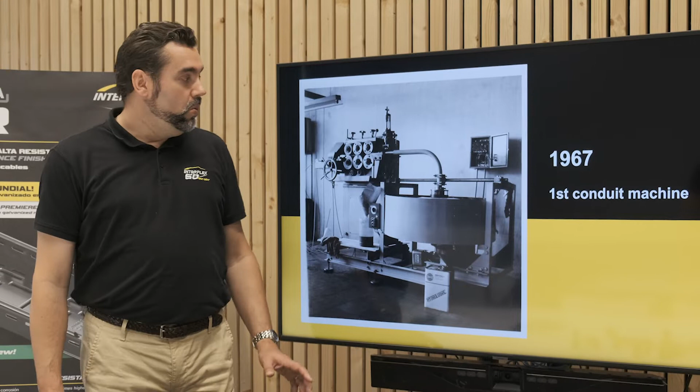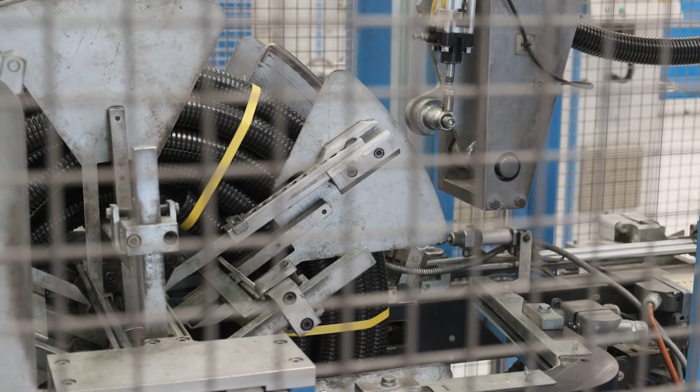INTERFLEX is a Spanish-based company located in Montcada i Reixac, a small city near Barcelona. Founded in 1967, the company continues to be family-owned. We are specialized in cable protection and management systems produced here in Montcada. We are the only Spanish manufacturer of a cable protection system made of polyamide, and one of the main producers of cable tray systems in the Spanish market.

We also have a long-standing tradition for exporting these manufactured products, with a wide presence in international markets. We actually sell our products in 48 countries across 5 continents.

INTERFLEX provides a close relationship to its customers because we are family owned and tend to be very tightly connected with them. Both Xavi and I belong to the second generation of the company, which shows INTERFLEX's commitment to go further and further.

We have a very ambitious plan for growth in the next 5 years, and for this reason we've made very big investments in our facilities over the last 2 to 3 years. We'd also like to remark that customer-oriented value is critical in our company approach, as well as our honesty, commitment, competence, and consciousness about environmental change.

INTERFLEX completely renewed its offices, production and secondary warehouse in 2020. The surface for this amounts to a total of 17,000 square meters.

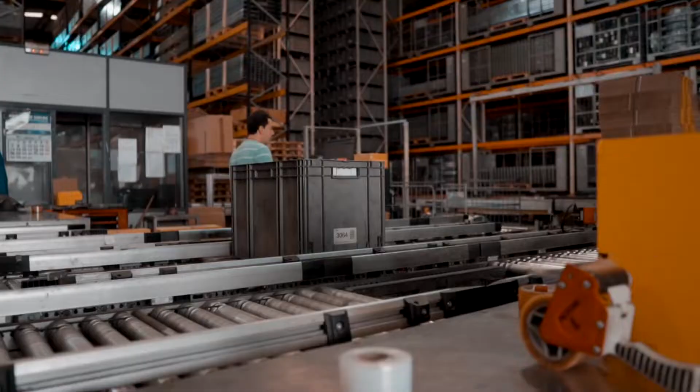INTERFLEX also has a completely automated logistics center in the same industrial estate, reaching 5,000 square meters to secure fast service, plus additional logistics centers in Spain in cities like Madrid and Bilbao. Our branch company is based in Colombia for service and deliveries into the Central and South American markets.

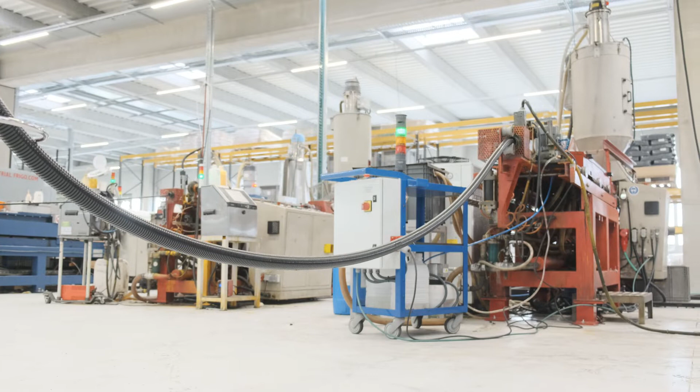We are one of the few producers in the world of a complete polyamide flexible conduit system. The main objective of this product is to protect electrical cables from mechanical and environmental hazards. Xavi will now explain the main features of these very versatile products.

The first advantage is the extreme ease of installation. To install the conduit, you just need to insert it inside the fitting, which gives an already high IP66 protection degree. To release it, you just need to push the release ring, twist the conduit and pull.

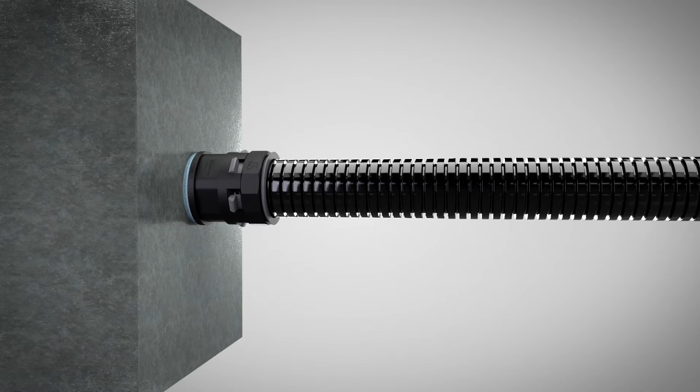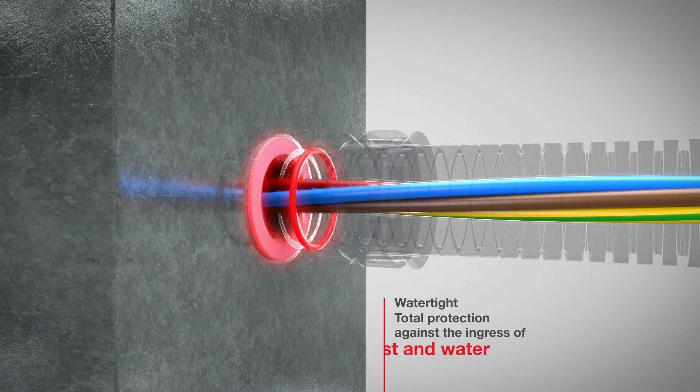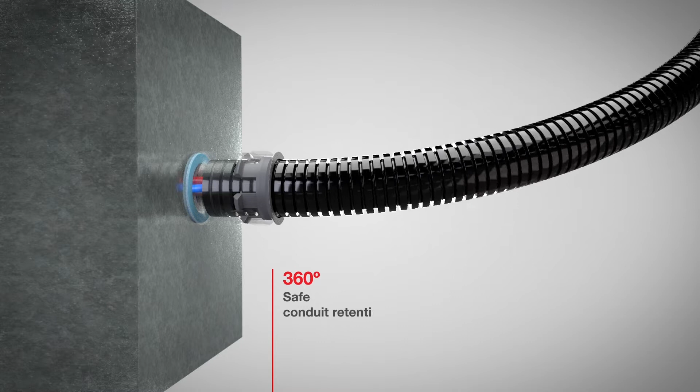In case you need to increase the protection against the ingress of water, you can increase to IP68, IP69, simply by adding an O-ring and a sealing gasket. This simple solution is possible thanks to the specially patented profile of our conduits, unique on the market. This gives complete protection against dust and water, increasing the safety of the equipment. The special connector design ensures a 360-degree retention of the conduit, increasing pull-out resistance and better behavior for dynamic applications.

Some customers ask us why we have such a big amount of conduits in our catalog. What can you say about this, Xavi? Well, the advantage of having such a wide range is that we can propose the best solution for the customer's needs. For example, depending on the mechanical requirements of the installation, we have different impact and compression resistant values, as well as models for static or dynamic applications, such as robots. This gives them a broad application range.

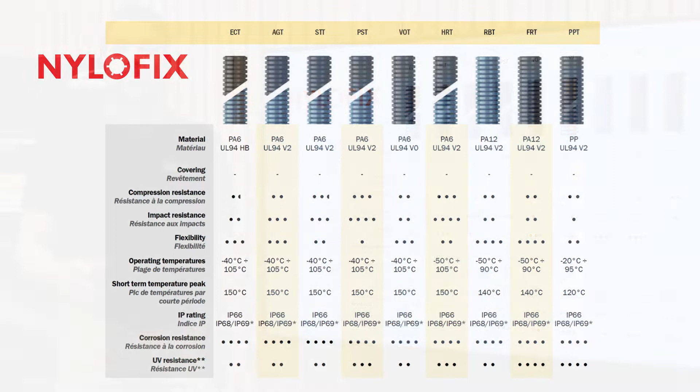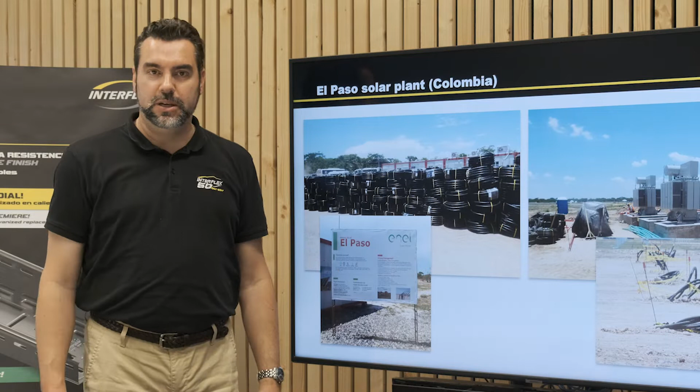We will give you 3 real application examples that showcase the advantages of this product range. The first is a solar power plant. This type of energy is having a big boom at the moment. Here we have an example of an installation made in Colombia, at the El Paso power plant. These installations suffer high UV radiation levels, which is a concern for most engineers, as ultraviolet radiation tends to destroy plastics after a few years.

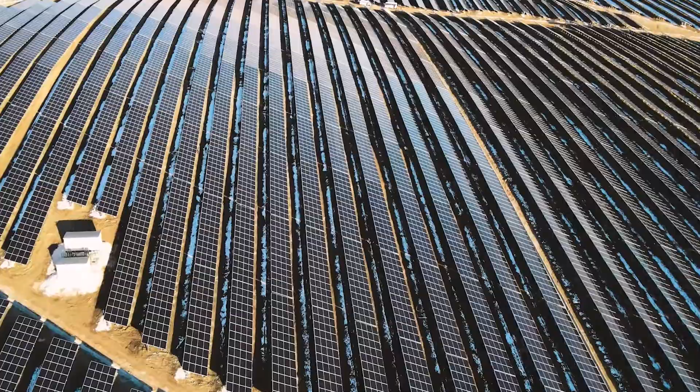Even though our black conduits ensure correct UV resistance, there is no specific test or assay for UV resistance in the standard for flexible conduits, IEC 61386. For this reason, at INTERFLEX we have drawn upon the North American standard UL 746C, which tests the outdoor resistance of plastic materials, making us the only manufacturer of flexible protection systems for industrial purposes with a certificate for ultraviolet resistance for conduits. Search for the F1 classification and the UL 746 logo.

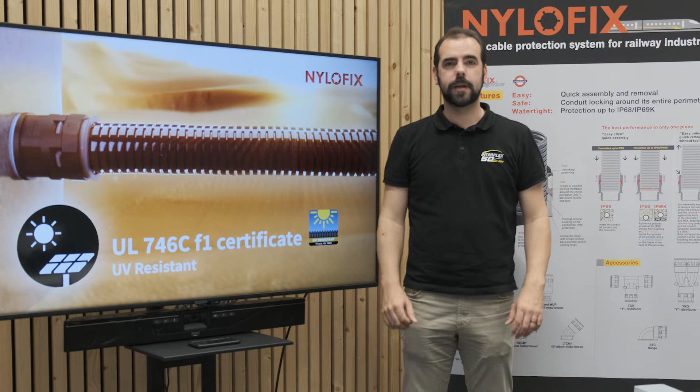This means the conduit model has been tested and certified for outdoor resistance, keeping its mechanical and physical characteristics intact. There are a few models with this homologation, with different versions for increasing crash resistance, and also a specific model, PPT, able to be installed in extreme environments with extremely low or high humidity levels, for example permanently lower than 20% or higher than 80%.

Another application where polyamide conduits are highly popular is windmills. The reason is that polyamide is inherently corrosion resistant, which means conduits and accessories will not be affected by aggressive environments, such as offshore installations with a high saline concentration.

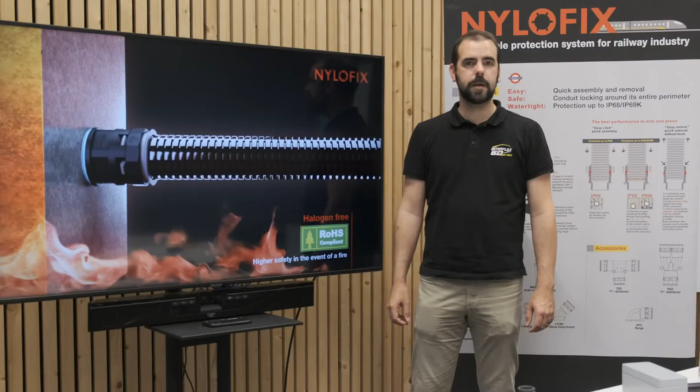Xavi, there's a good reason to install polyamide conduits instead of other types of plastics. Why is that? Yes, that is because all our INTERFLEX products are made of polyamide, which means they are halogen-free. There are different fire or burning ratings according to the UL 94 norm, from HB to V0, but all conduits are self-extinguishing, which increases installation safety in case of fire.

Moreover, polyamide conduits have a broader temperature range, going as low as -50 degrees, with -40 being the standard, and as high as 105 degrees Celsius, with the possibility to increase up to 120 and 150 for a short term.

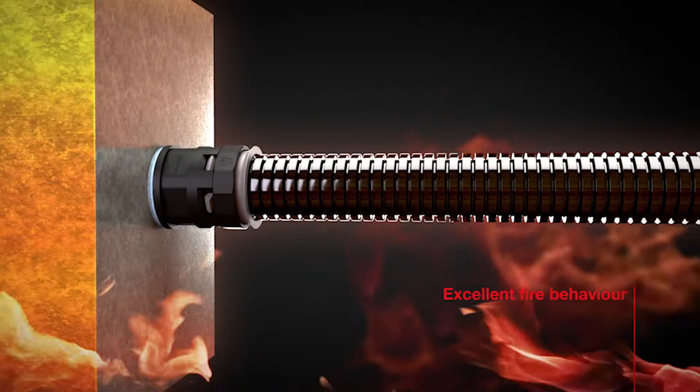This topic about fire brings us to another area where polyamide systems have been increasingly gaining popularity: the railway industry. This is one of the most challenging sectors. The fire requirements for plastic or flammable materials in general are very demanding. They need to comply with specific norms such as the European standard EN45545. Generation of smoke and its opacity are controlled in order to provide the highest safety standard in the industry.

If all these different options are not enough, we also have a complete range of metal conduits, which provide a higher mechanical resistance and withstand extremely high temperatures. It's made fully of metal and also offers ground connection.

Let's introduce the other main product range that we produce here in Montcada i Reixac. If your customers need to route their cables, look no further. We have the multi-via cable trays to support you, and it has two different versions: the VIATEC sheet steel cable trays and the VIAFIL wire mesh cable trays.

The VIAFIL trays are extremely versatile and can be shaped to properly adapt to different installations on site without the need of special accessories, simply cutting some of the wires and bending the tray. You can do curves, inside bends, outside bends, derivations, and you can do so using the wire cutters. We have mechanical versions like this one, or we have also electro-hydraulic versions.

There are many accessories that don't need additional bolts or nuts. You simply bend some of the tabs and fix the tray. They are called InstaFix, just like our new VIAFIL InstaFix, for which you don't need any bolts. You just click one length of the tray with the other, like so.

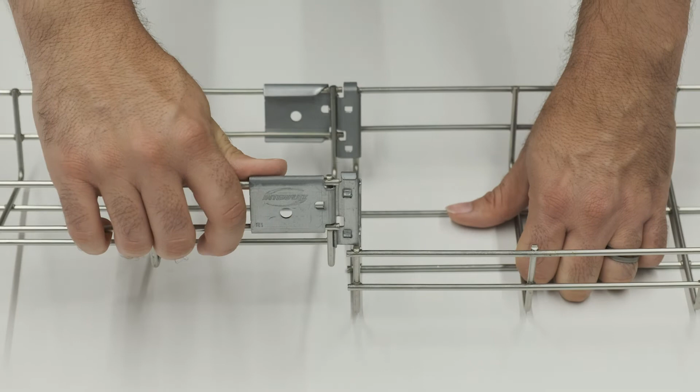This InstaFix system reduces the installation time by approximately 70% compared with a standard system. This is really especially important in big projects where time is very critical.

The other system, the VIATEC sheet steel cable trays, are also self-coupling, even though they need to add a few bolts to ensure the connection. You just need to approach one tray length to the other, lift one of the sides, insert the self-coupling part, and lower the side again.

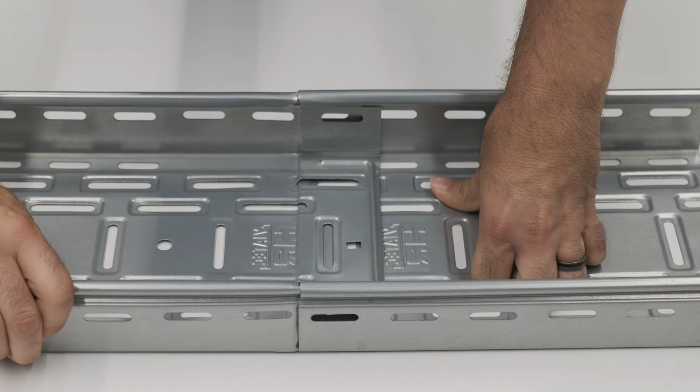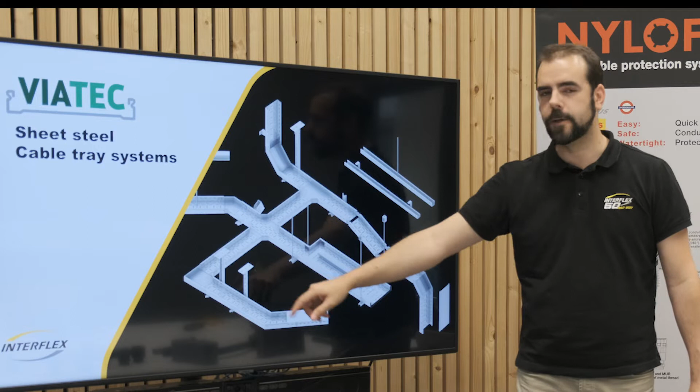The VIATEC trays also have a wide range of accessories like curves, bends, derivations, but it shares many of the equipment with the VIAFIL trays. You should check if there are any local regulations in your country in order to use one model or the other. But one of the main criteria to correctly select the tray is the corrosion resistance, depending on the environmental conditions of the installation.

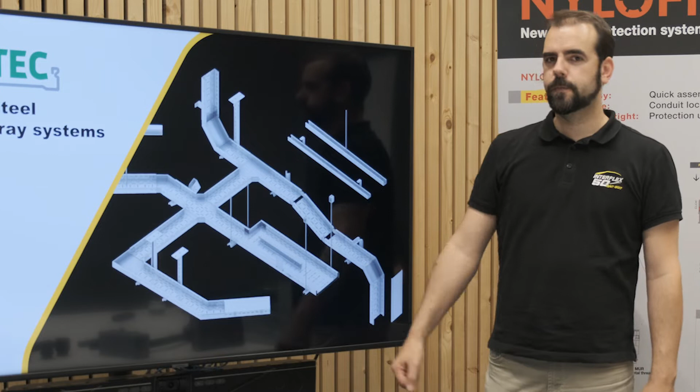For example, for indoor applications, we use either Sendzimir or Z3 electrozinc plating, depending on whether you are using VIATEC or VIAFIL cable trays.

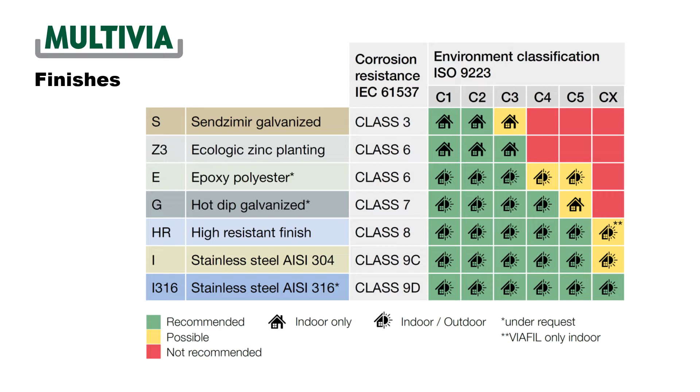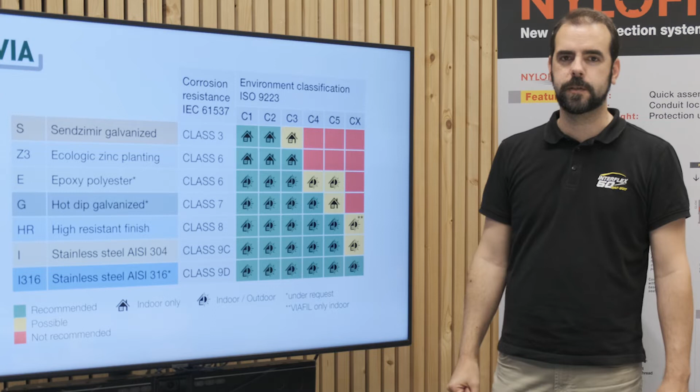Our VIAFIL trays with HR high resistance coating, an alternative to hot dip galvanized, are used inside the windmill towers. This surface treatment, classified as Class 8 according to IEC 61537, has an extremely good corrosion resistance, which means the aerogenerator can be installed offshore.

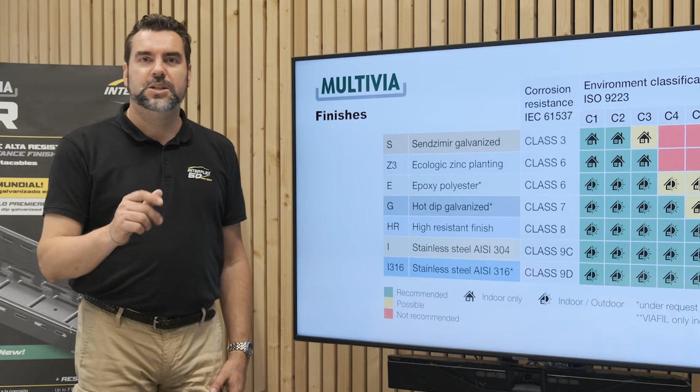This finish is also widely used on solar power plants, thanks to its extremely good outdoor resistance. We also have this special HR finish with our VIATEC cable trays, and this is a world premiere on the cable tray market.

As it happened with our VIAFIL HR, INTERFLEX is a pioneer and the only manufacturer right now selling a valid alternative to hot dip galvanized for this type of tray. This new finish has many advantages over hot dip galvanized, including a higher corrosion resistance, up to 7 times compared with standard galvanization, a better surface finish, and a more ecologically friendly treatment process, with less energy consumption, less carbon dioxide emitted, and with no harmful substances, making it 100% recyclable.

An EPD, or Environmental Product Declaration, is available for the raw material. These type of certifications are more and more demanded, especially in the construction and civil engineering sectors.

In this sense, INTERFLEX has become the first cable tray manufacturer to have obtained the Declare environmental label. As its name indicates, this certification declares which components are present in our cable trays and whether or not they contain substances that could be considered harmful either for people or for nature. This label also indicates if a product is recyclable or not.

Our VIAFIL and VIATEC cable trays are red list free, which means that they do not contain any substance of concern and are 100% recyclable.

Other finishes where our MULTIVIA cable trays can be used include stainless steel, which is preferably used for the food industry, in areas where direct contact with food means that they have to be cleaned very regularly. It's also needed for really extreme saline environments. We have this finish available in AISI 304 or AISI 316 versions.